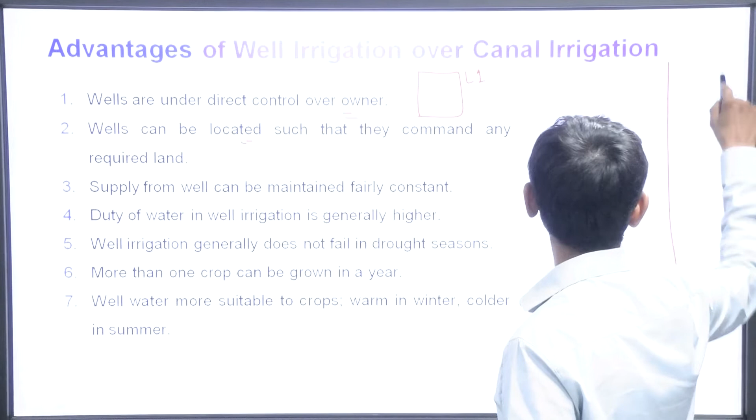We discussed this in the last class as well, that is, the wells are under direct control of the owner, so it can be used as per the owner's needs in the field. Second point is that wells can be located such that they command any required land. So if you want irrigation for a particular land, let's say L1, and the canal is at a much larger distance, due to friction losses and other factors the water cannot be brought from the canal. In that case, we can simply use the well present at that required land L1.

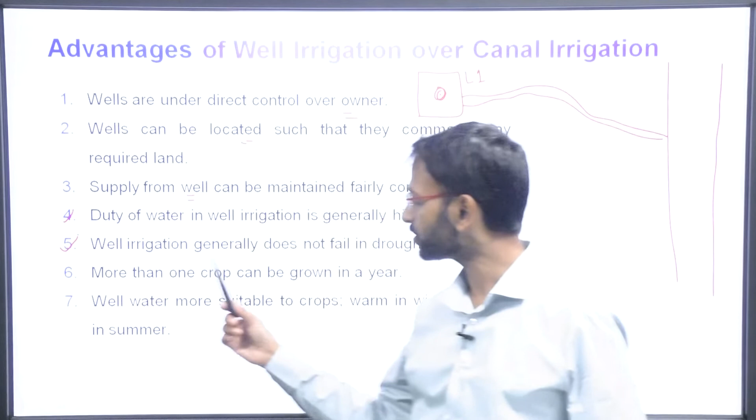Third is that the supply from the well can be maintained fairly constant, which is not the case with the canal irrigation that you have already studied. Fourth point is that duty of the water in well irrigation is generally higher. Fifth point is that well irrigation generally does not fail in drought seasons, because the water is stored in the water table, that is, underground.

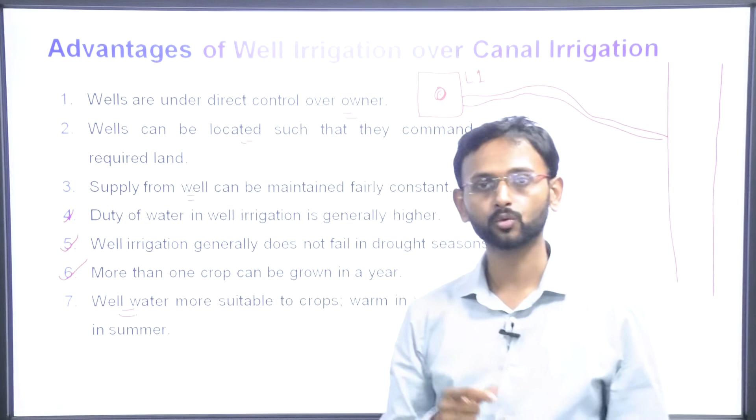Sixth point is that more than one crop can be grown in a year using well irrigation. And the well water is conducive as per the environment. If it is winter, it will be warm, and if it is summer, it will be cold. So well water is more suitable to the crops as compared to canal water.

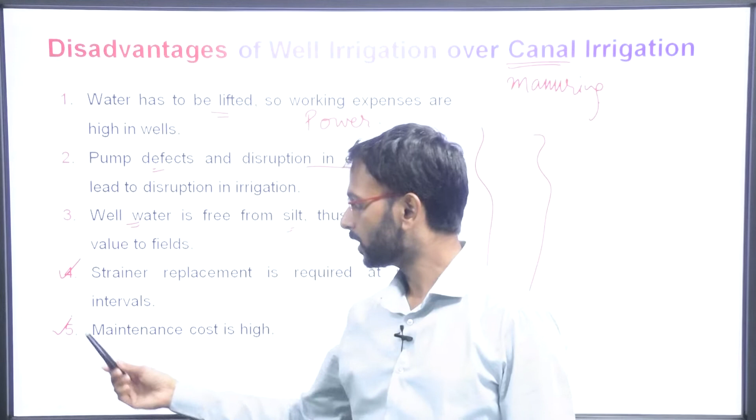Fourth point is that strainer replacement is required at periodic intervals, and that is a very costly affair. So usually people go for a new well development. Fifth is that maintenance cost is very high as compared to the canal, which is basically in the scope of the government.

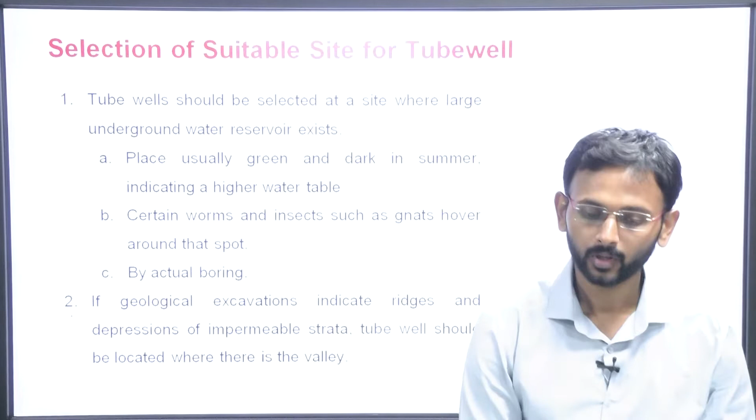Now let us talk about the suitable site for the tube well. Tube wells should be selected at a site where a large underground water reservoir exists. In that case it will be easier to extract the water, and if there is a large water reservoir in the ground, it will be very beneficial for the environment also, so that replenishment is not required at that time.

The place where the tube well has to be located is usually green and dark. Why? Because of the moisture, it indicates a high water table. Second, you can locate it by certain worms and insects such as gnats hovering around that spot. So if you see any land like this, you can go for that site for the tube well. And third, by actual boring you can select the site for the tube well.

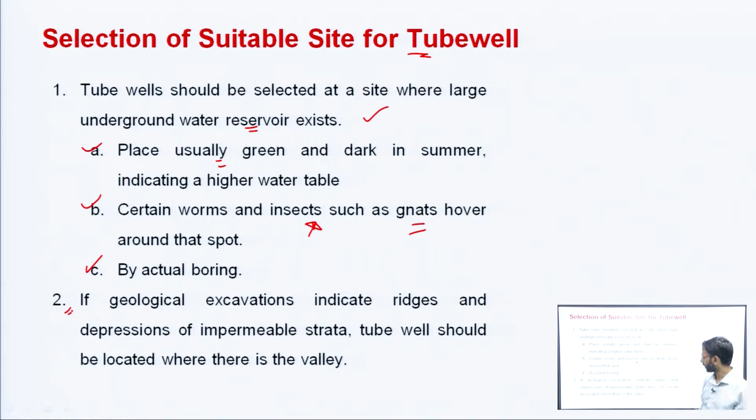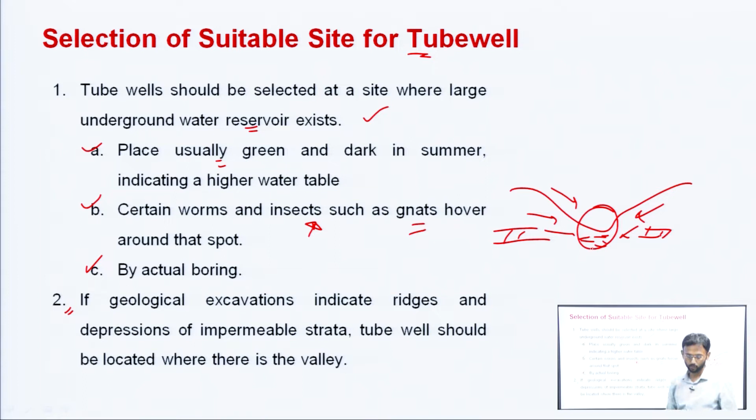Next point is that if geological excavations indicate ridges and depressions of impermeable strata, tube wells should be located where there is a valley. What does valley mean? It is something like this. If the surrounding area is impermeable and there is one valley, the water will come and get stored in this region. So you will get a full supply of water, and the tube well will be located in this zone.

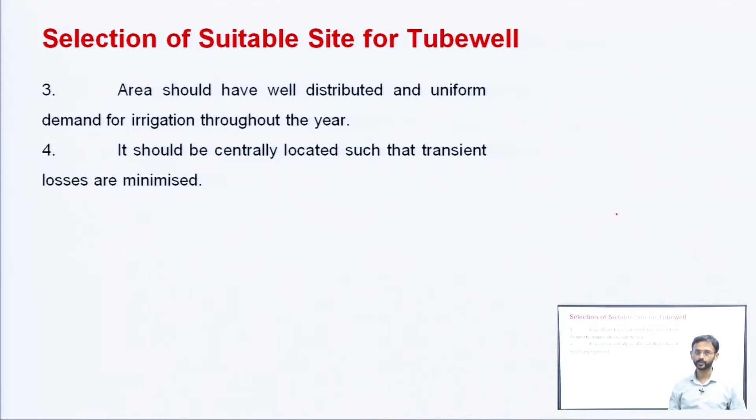Next point is that the area should have well distributed and uniform demand for irrigation throughout the year. मतलब वहाँ पे यदि crops ही नहीं grow करनी है हमको all around the year, so we should not go for the tube well basically.

It should be centrally located such that transient losses are minimized, so that the entire area is covered. If this is the area, well number 1 is there and well number 2 is there. तो इस तरीके से होना चाहिए कि all the directions should be covered in an easier way. अगर well number 2 में हम जाते हैं, the transmission losses will be higher.

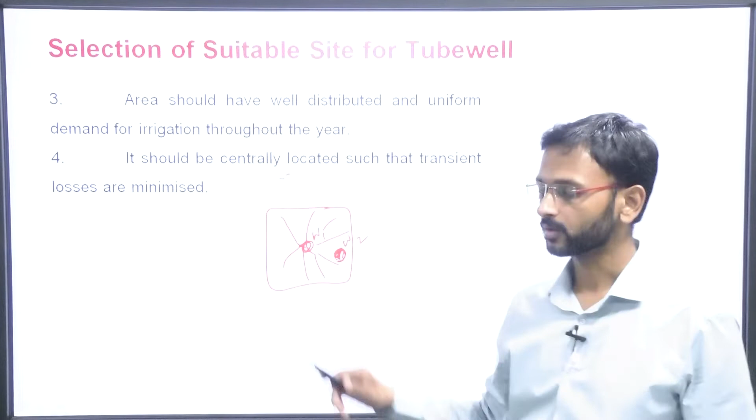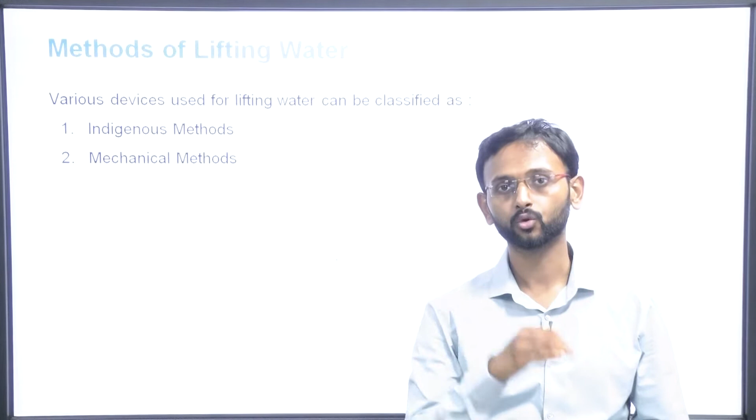Now let us talk about the methods of lifting the water. How can the water be lifted from the underground reservoir to the ground for our use? First is the indigenous method and the mechanical method. तो indigenous methods जो पहले से use होते आ रहे हैं, उसमें पहला method है the basket method, and also there is the bucket method.

तो bucket method में a person simply uses the rope and this lever arrangement, and the bucket is lowered, and it is the most conventional form of lifting the water. Second is the Doon method, wherein the Doon, the fulcrum and the weight are used. Via this fulcrum and the rope, the water is pulled up and lifted from this portion.

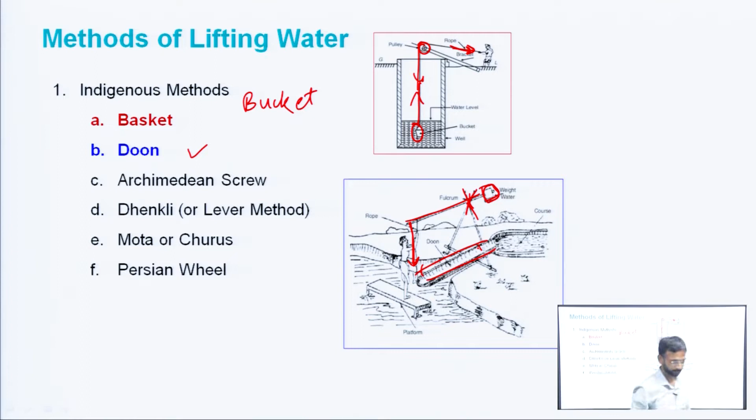Then is the Archimedean screw. In the Archimedean screw, this is the water level from where the water has to be extracted, and this has been placed at around a 30° angle. This is a type of screw जहाँ पे इसका lower level is under water.

Now when this handle is rotated, the screw will move, and as the screw moves it will take in the water and take it to the top, where the water will be stored in this reservoir, और यहाँ से फिर इसको fields में हम transfer कर सकते हैं.

Then the fourth is the ढेकली or the lever method. इस lever method में there is a vertical post, simple physics, a weight is there; when you pull this down, due to the weight it will return to its original position. जैसा कि आपने railway के फाटकों में देखा होगा.

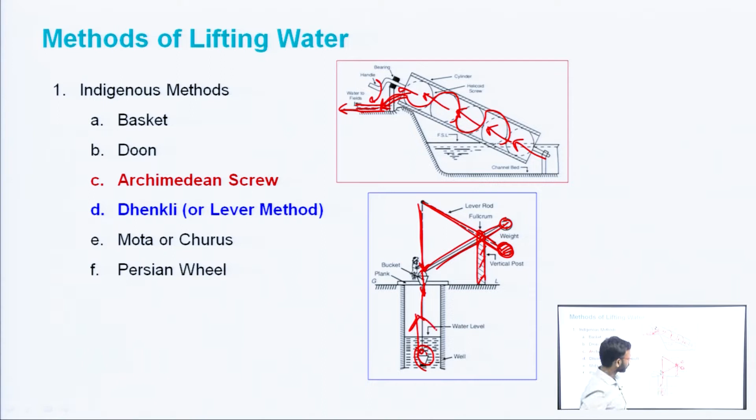And the मोटा or the चूरूस method, where we are using leather bags basically, and bullocks are used for lifting up the water. This is the lever arrangement, the pulley arrangement, and the water is recovered like this. Water is lifted up and then it is being transferred here.

Another is the Persian wheel method. It is a system wherein a gear arrangement is there. This is the vertical axis, जिसके about movement होता है, and this is the axis where the shaft is, and the shaft will be rotating in this direction. This is also a portion wherein the shaft is being attached.

यहाँ से water की lifting होती है, and there are multiple buckets that are filled at a time. इससे फ़ायदा यह होता है कि it is used for the irrigation of a large field. अभी तक bucket method और अलग methods for our own purpose थे, but यहाँ a large amount of water is withdrawn and used for field irrigation.

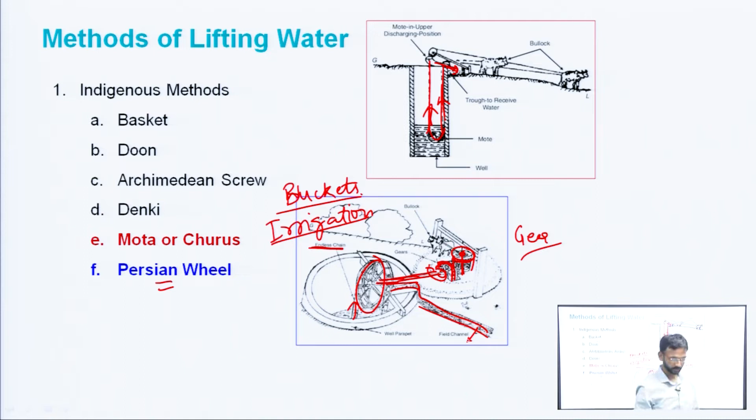So these are a few methods for the lifting of water, and there are some mechanical methods wherein a windmill can be used, a hydraulic ram can be used, and also pumps can be used.

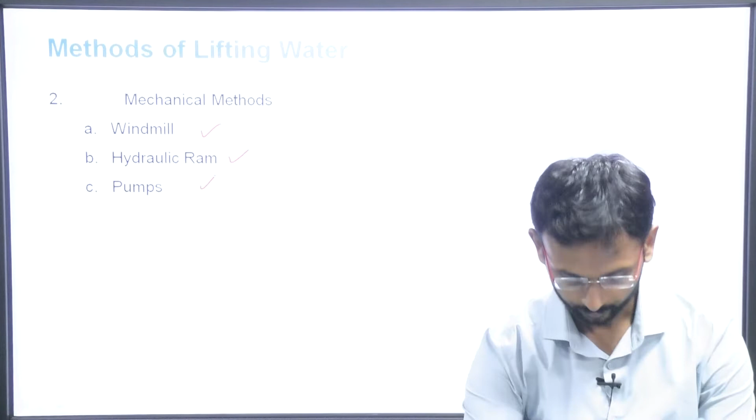So if we talk about the pumps, the discharge from the shallow open well is usually less, so the pumps which are in use are the following ones. तो shallow open well से जो pump use होते हैं वो बहुत ही कम cost के और they are very easily operated. First is the hand operated pitcher pump, second is the windmill operated plunger pumps, third is the turbine pumps, gear pumps and centrifugal pumps. So these are used for very much less discharge.

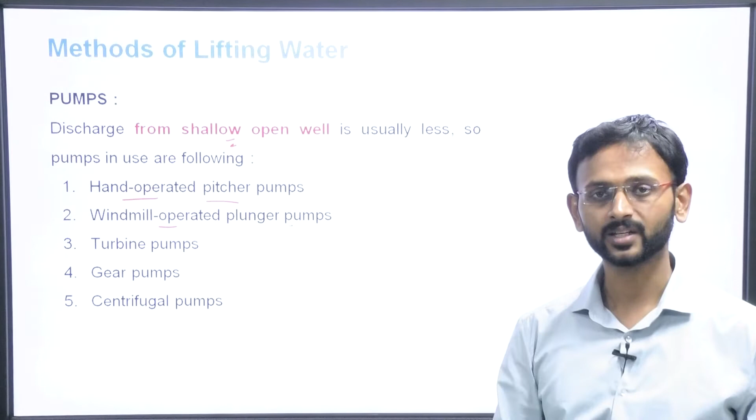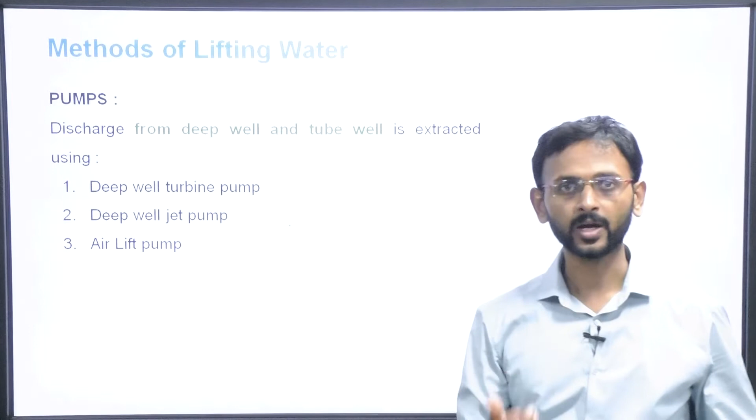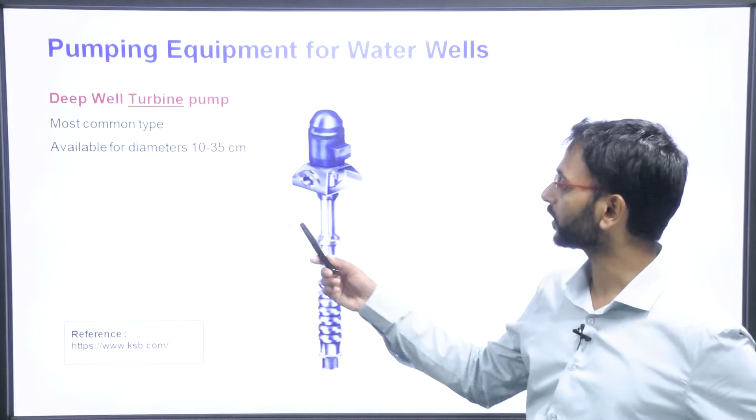Next, from the deep well and the tube well, we can use the deep well turbine pump, deep well jet pump and the airlift pump. So turbine pump, jet pump basically use होते हैं और airlift pump can also be used. So you can see here the deep well turbine pump, it is this type of figure wherein the diameters available are 10 to 35 centimeters.

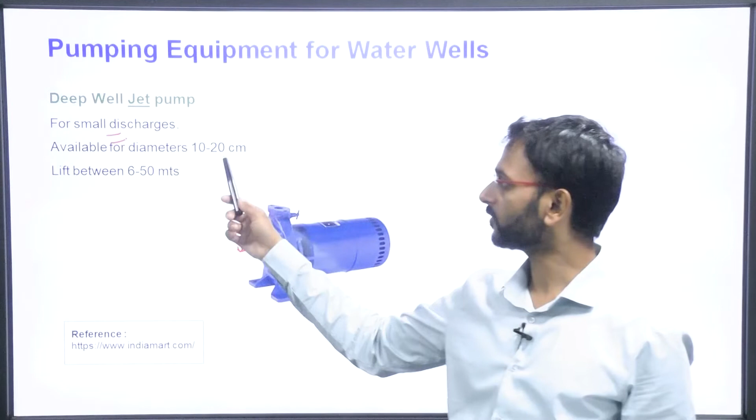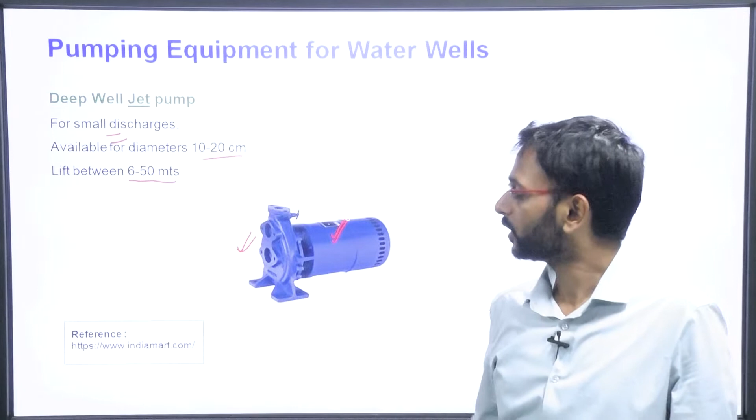Second is the deep well jet pump. You have already seen it in your homes also; for small discharges it can be used and it is available for diameters 10 to 20 centimeters. It lifts between 6 to 50 meters. You have already seen this at your homes, where you use it for lifting up the water.

Now one more point here: what are the factors for selection of the pump for a tube well?

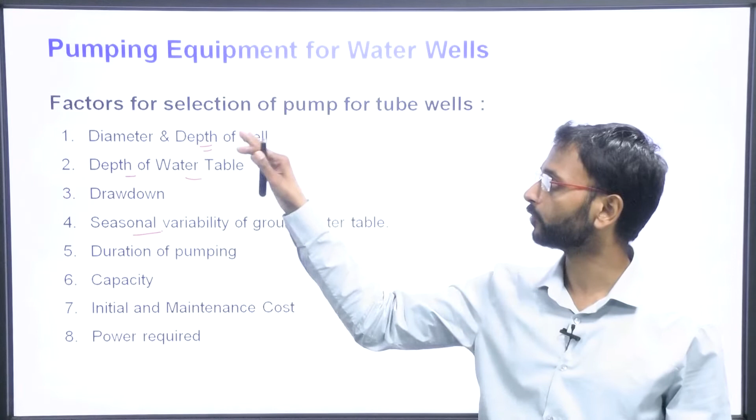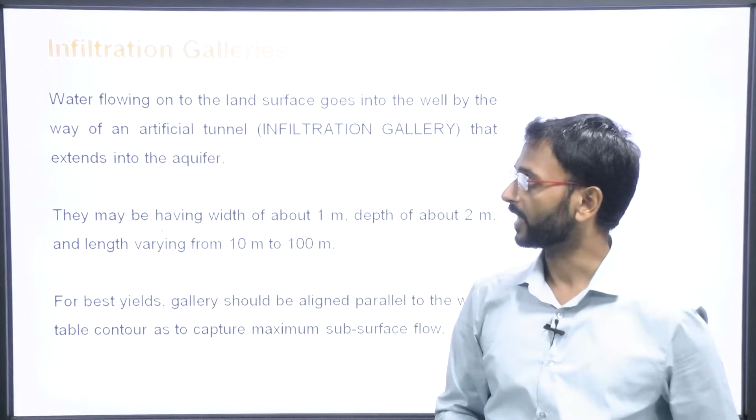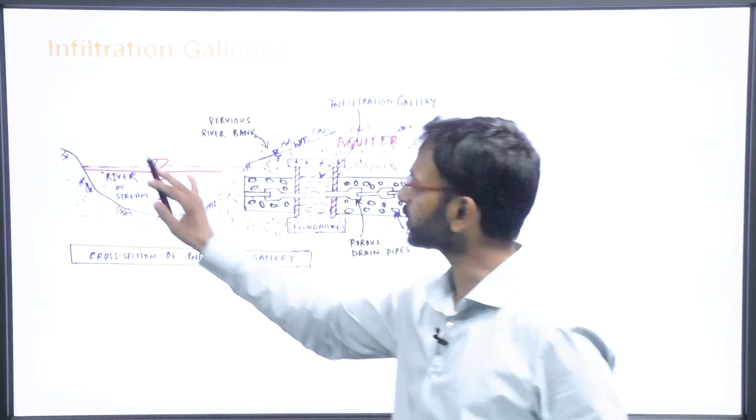Now the last topic for today's class and also the subject is the infiltration galleries. So infiltration gallery क्या होता है, पहले हम उसको देखते हैं. It is something like this. तो इसमें there is a river or a stream or a channel wherein the water is present. Now we have to get the water from this region. This is the pervious boundary or permeable boundary. Now what we do, we create a gallery here.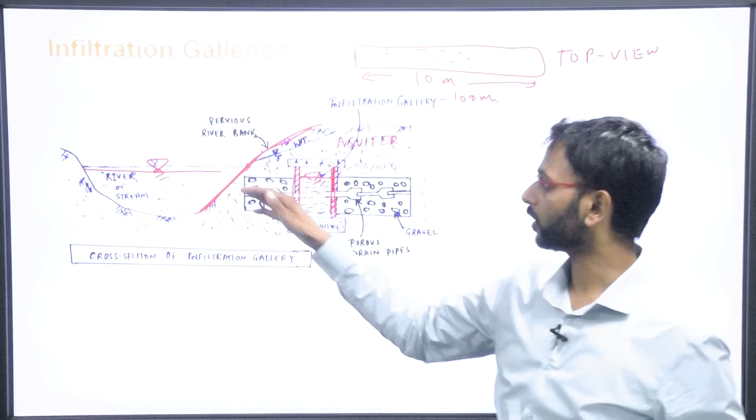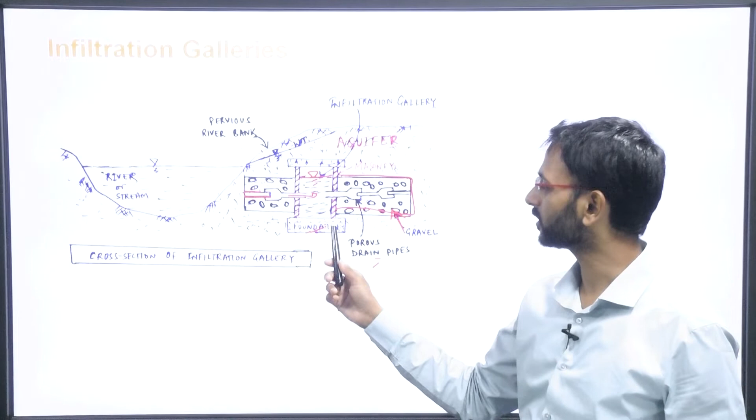It will be running along the bank of the channel, along the bank of the river. अगर हम cross section की बात करें तो this is the gallery wherein the water will be stored, with the help of the pipes here. और यहाँ पे gravel packing कर रखी है and also porous drain pipes are used. This is the foundation that has been created so that seepage does not take place.

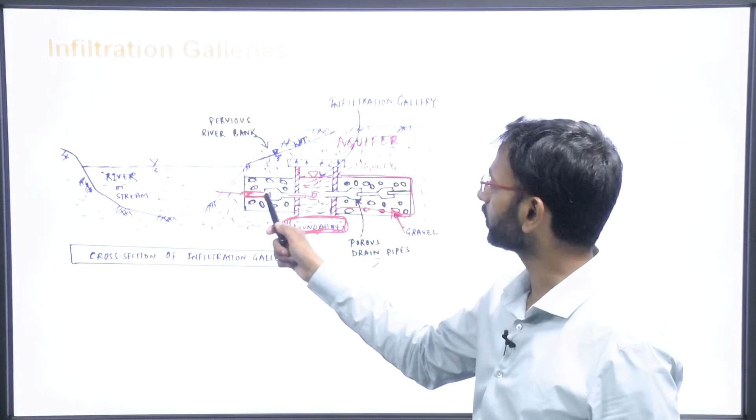तो ये foundation है so that seepage will not take place and we can utilize this infiltration gallery, which is also acting as a collection well. क्यों, क्योंकि यहाँ से जो भी water होगा, that will be simply transferred into the gallery.

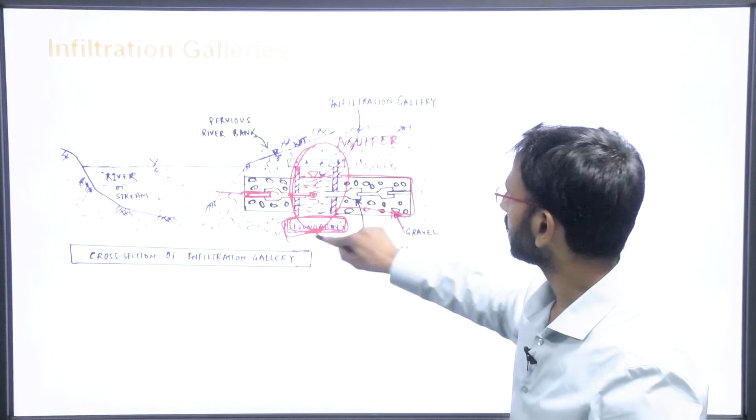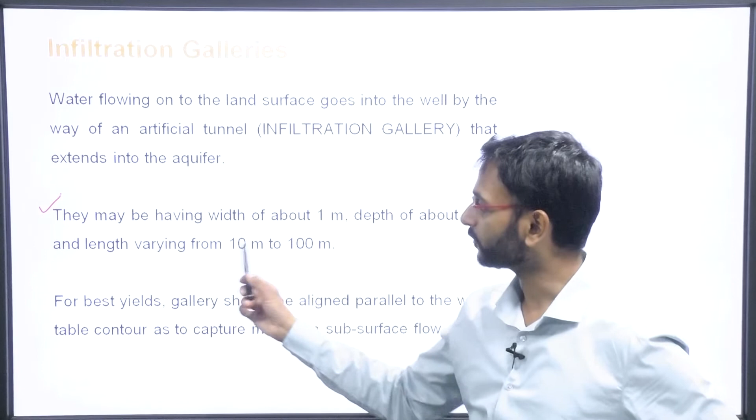तो अगर हम अब points को देखें, water flowing onto the land surface goes into the well by way of an artificial tunnel, and that artificial tunnel is known as the infiltration gallery, and it extends into the aquifer. Second point is that they may have a width of about 1 meter, depth of about 2 meters and length varying from 10 to 100 meters. तो top view में देखेंगे तो आपको ये समझ में आएगा, that is the length and width of about 1 meter.

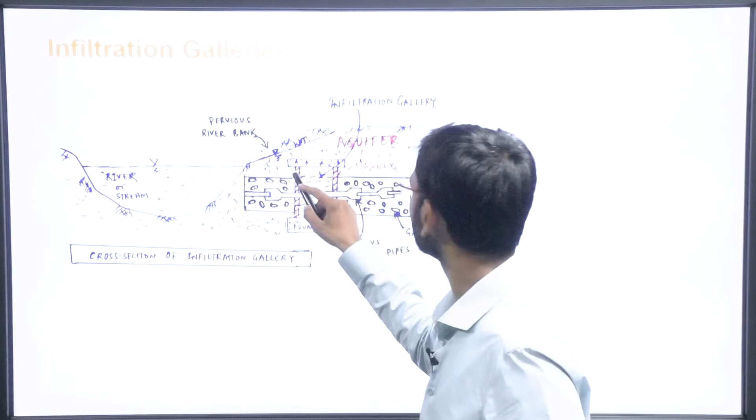So the width here is, this is the 1 meter width. Also you can see here that the depth is what, around 2 meters.

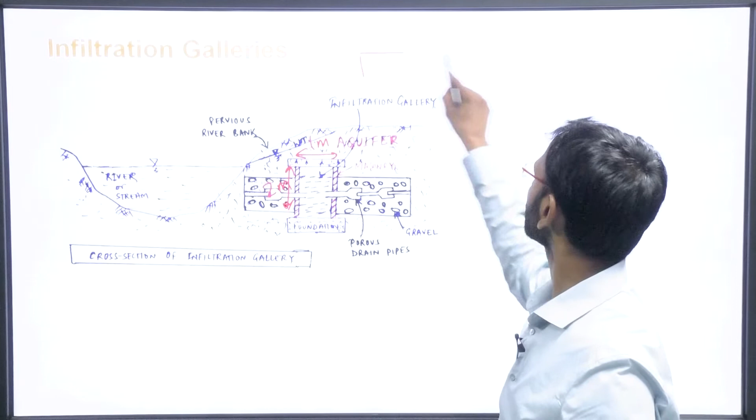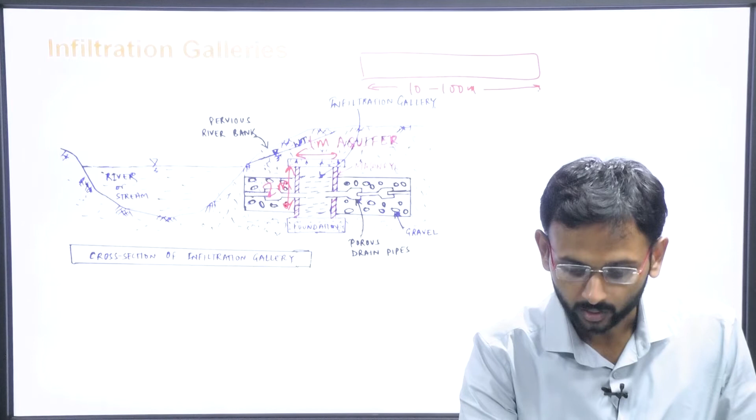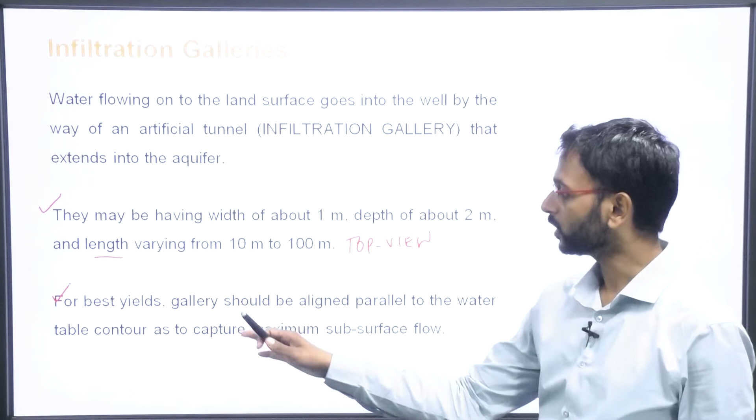And are running parallel to the bank of the river. Last point is this, that for the best yields the gallery should be aligned parallel to the water table contour so as to capture the maximum subsurface flow. So that is also there, so that the entire water is coming and it is draining on to the infiltration gallery.

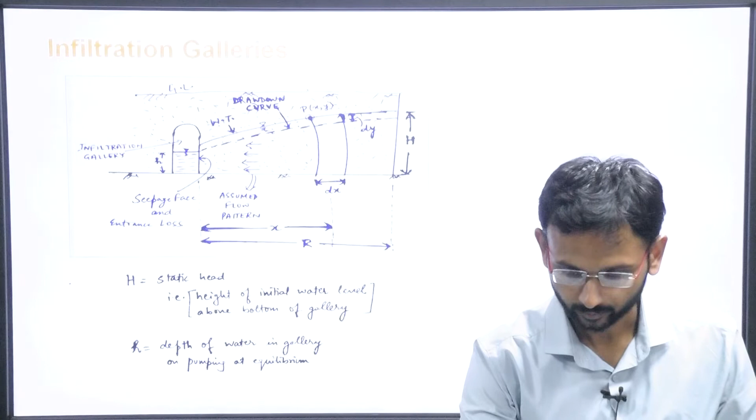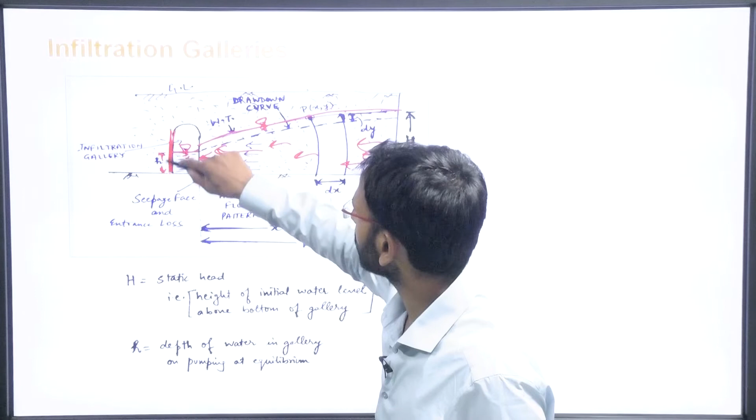Now let us see here the cross section, and this is the infiltration gallery, and the water level in the infiltration gallery, that is the small h. Okay, and also if you see, this is the water table here. When the discharge is taking place, if the river flow is like this and the river water is draining into this infiltration gallery, this face is nothing here, but this face is the porous face and it is receiving the water from this end.

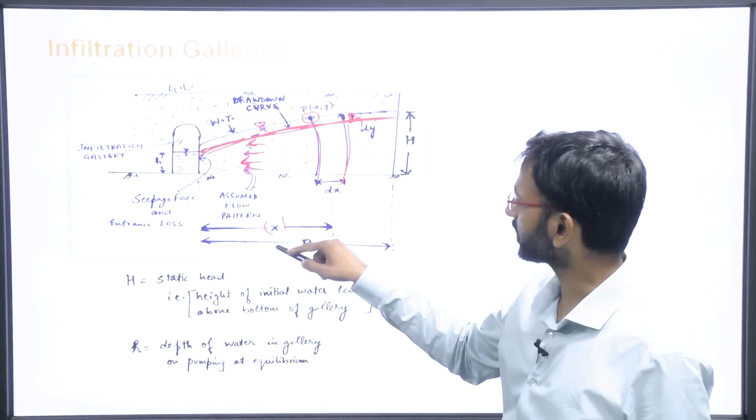Now you have to assume here this strip of dx width, and because of the drawdown curve, when the water reduced, the water table was here, it is reduced to this red line here, and the width of this here is dy. This is the assumed flow pattern, which we take as horizontal. The distance at which we assumed this point P(x, y), that is the x distance. This strip is at a x distance.

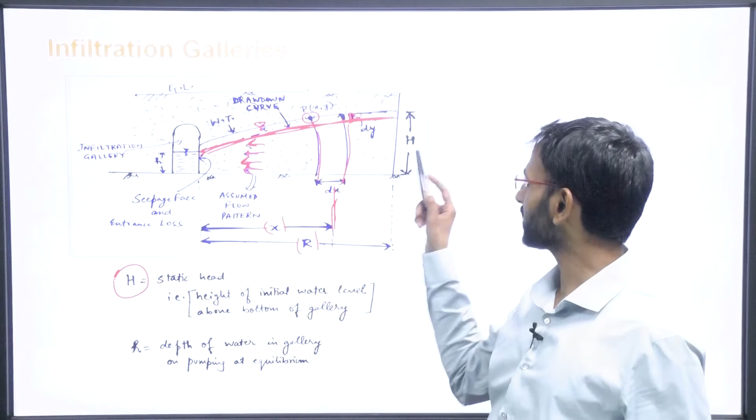This R is the radius of influence, which you always know. What is H? H is the static head of the water table. And H, as we have been discussing in this whole module, is the height of the initial water level above the bottom of the gallery, and the small h is the depth of the water in the gallery on pumping at equilibrium. So these are the two terms that you have to see.

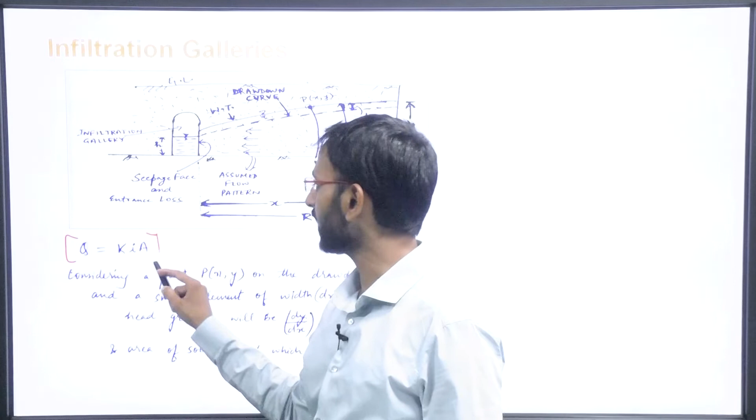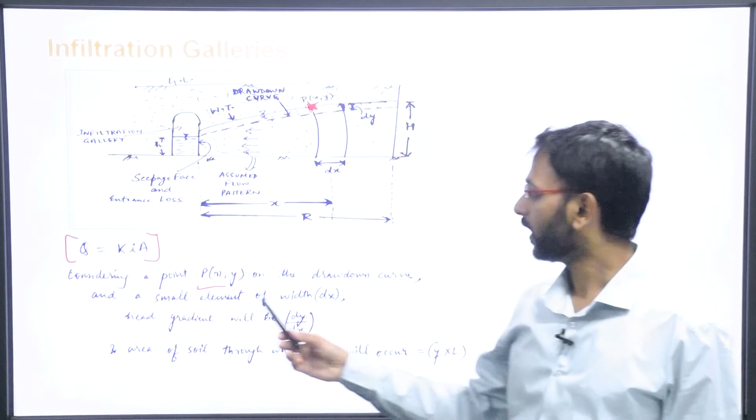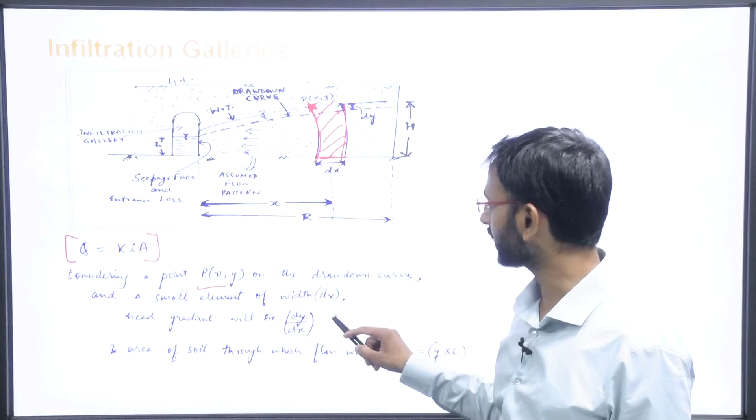Now again, if you want to derive the formula for the discharge from this infiltration gallery, q is equal to k into I into A. Considering a point P(x, y) on the drawdown curve, and a small element of width dx, the head gradient will be dy by dx. That is the head gradient due to which the water flow is possible here, and the area of the soil through which flow will occur is equal to y into L.

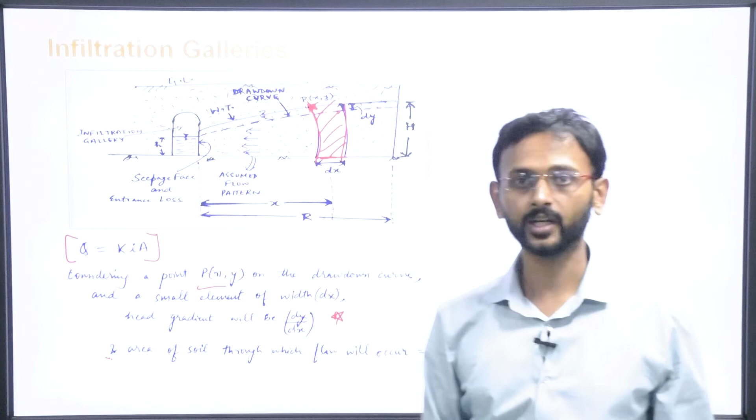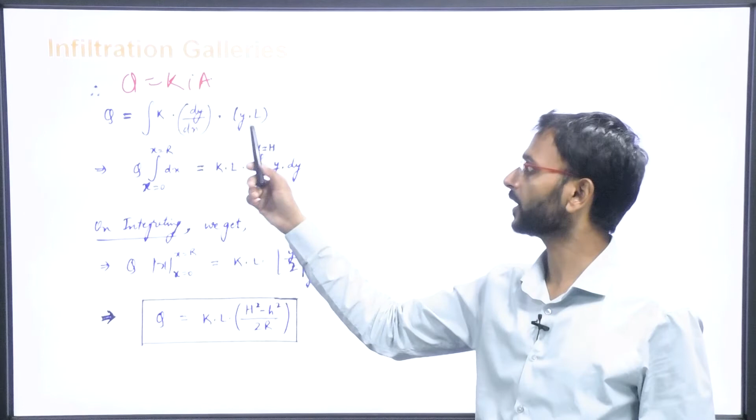Therefore, Q is equal to k I A. The area is y into L, I is the hydraulic gradient, that is dy by dx, and this is k. So if you put it here, you can simply integrate it, and the value comes out to be Q is equal to k into L into (H square minus small h square) upon 2R. So that is the discharge value which you will be getting from the infiltration gallery.

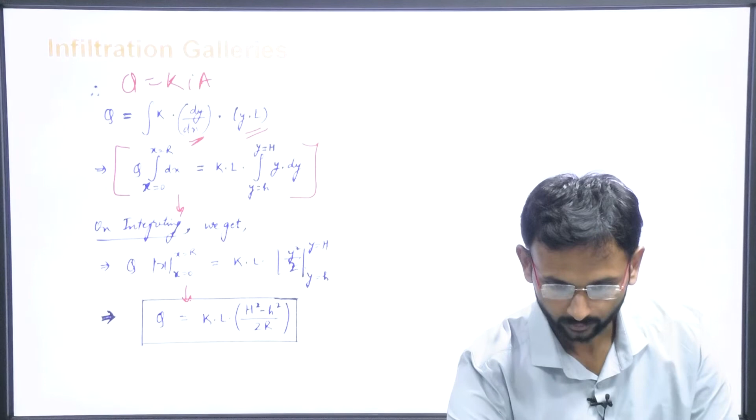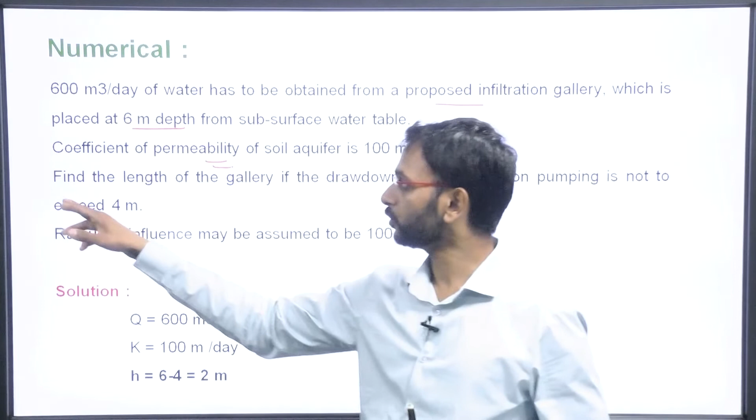Now let us take a look at the numerical here: 600 meter cube per day of water has to be obtained from a proposed infiltration gallery which is placed at 6 meter depth from the subsurface water table. Coefficient of permeability of the soil aquifer is 100 meters per day. The radius of influence may be assumed to be 100 meters. What do you have to find? Find the length of the gallery if the drawdown in the gallery on pumping is not to exceed 4 meters.

Now what is the data given to you? 600 meter cube per day of water has to be obtained; this much water we need daily for our work. The permeability is 100 meters per day. The radius of influence given is 100 meters. The depth here is 6 meters, that is H is equal to 6 meters. One more thing is said: find the length of the gallery if the drawdown in the gallery on pumping is not to exceed 4 meters.

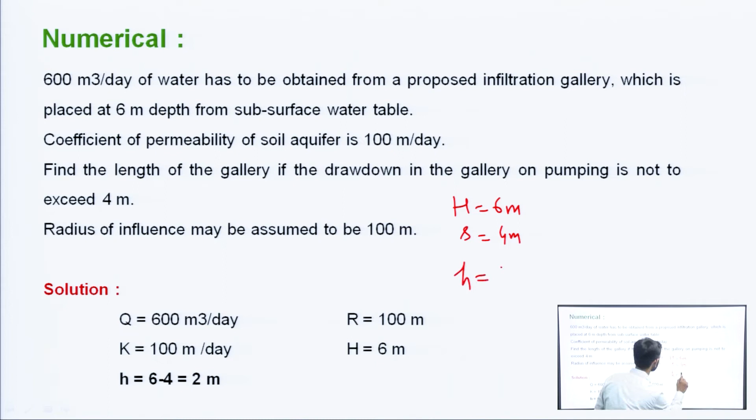So if I say that this H is equal to 6 meters, and the drawdown is not to exceed 4 meters, so you can easily find out this small h. Okay, this is H minus s. Small h क्या है? This is the water table height. जो नई water table हुई है उसका height कितना है? That is small h. This is 6 minus 4, that is equal to 2 meters.

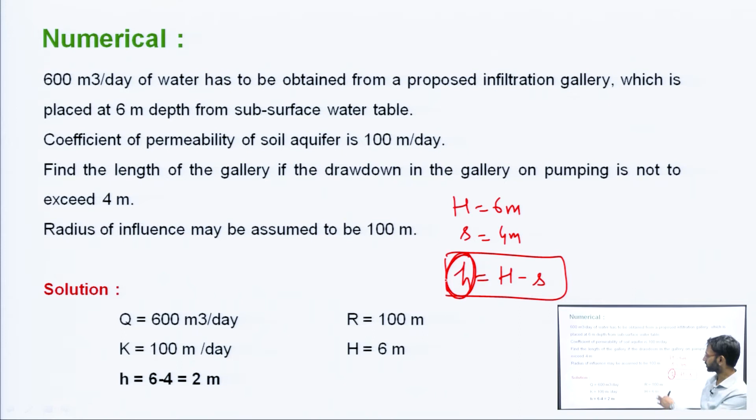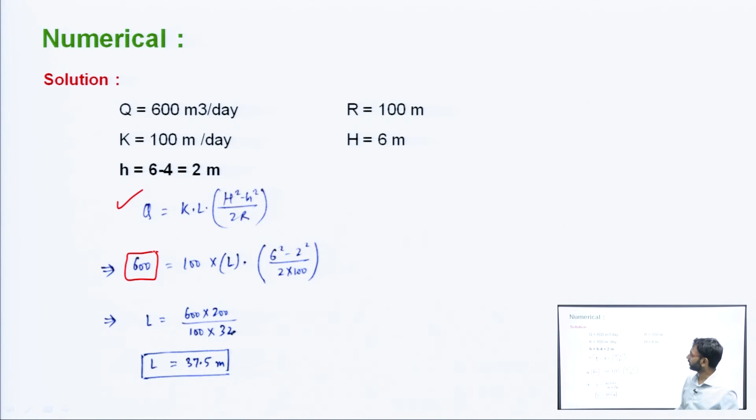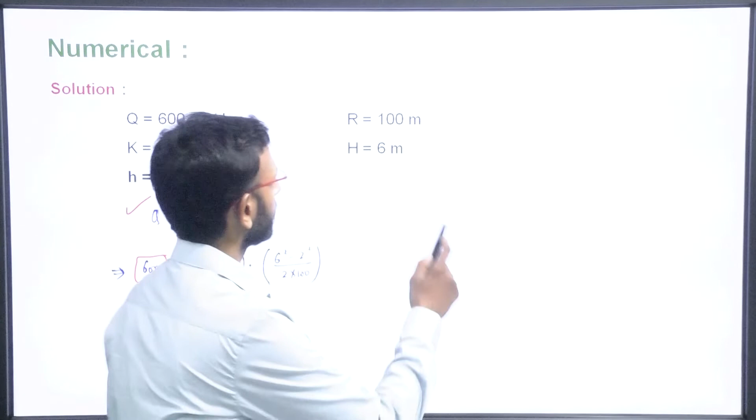अब आपको formula पहले से ही पता है for this infiltration gallery, that is q is equal to k into L into H square minus small h square upon 2R. So you know the value of this discharge here, that is 600, and it is equal to 100 into L into 6 square minus 2 square upon 2 into 100. So जो infiltration gallery है that is coming out to be what? 37.5 meters. तो यदि आप इसको top view में देखेंगे, so this length is 37.5 meters.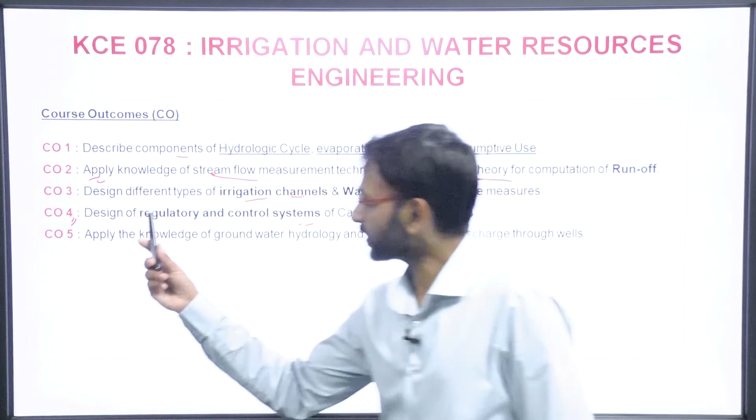What are the different regulatory works one can go for, and these were used for the control of the velocity of the water in the canal. For the discharge control we can use these regulatory and control systems. And we also discussed about the irrigation outlet, कि semi module outlet क्या है, that is a flexible outlet, non modular outlet क्या है and modular outlet क्या है. We also discussed in detail about the Gibbs module.

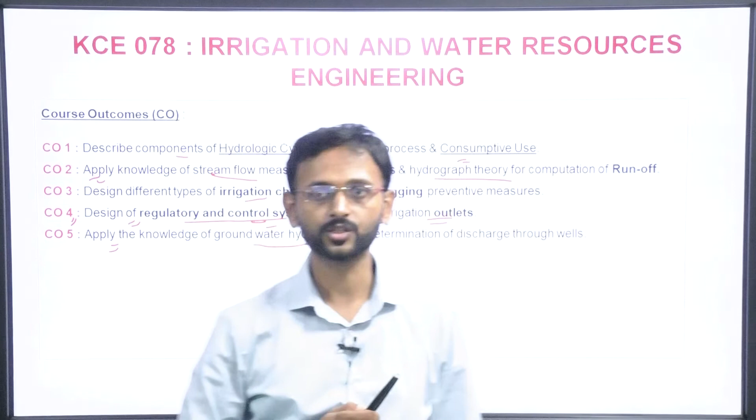उसके बाद लास्ट यूनिट में हमने जो आज ख़त्म करी है, that is the application of the ground water hydrology and also the determination of the discharge through wells. तो इसमें हमने steady flow through aquifers की बात करी थी. We have also discussed about the different aspects of lifting of the water from the ground, how that water can be utilized for our own purposes and for the irrigation purpose.